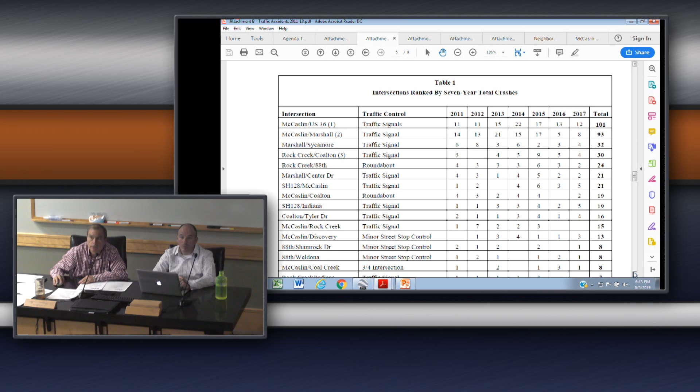Okay, we track by intersection. That's 2017 - did I pull out the wrong one? Yeah, while you guys are pulling up that sheet, I think that table is really outstanding because it tells you where the problem areas are.

Before it gets up there, I'm really a little bit worried about McCaslin and Discovery, just because it's going up, and anybody coming off Discovery going west doesn't have a merge lane. So they're coming off Discovery on McCaslin going downhill, and there's no acceleration lane? There's nothing. Granted, everybody coming down McCaslin's supposed to be slowing down, but many aren't until they get to the traffic circle.

And given that we are going to be pushing more traffic through Discovery, I'm a little concerned that won't get better. That's a good idea - maybe we can do a special study in the year, find out what's going on with those.

Yeah, because there's a dedicated right turn lane to get into Discovery Park, but coming out, there's no special way. But at the same time, with the punching of Discovery to downtown, they can come out on Main Street, so that is a new way. But you're, in terms of needing acceleration lane, you're accelerating into a roundabout, so...

Yeah, I know, and I'm just curious - it's only 3 accidents, but it still seems like a lot to me. The majority of McCaslin and Discovery accidents are all single vehicle accidents. Some have been during snowstorms. We had a guy that... actually we had 2 different cars that during construction drove off the pavement, and there's that dip, and it tore off the bottom of their car.

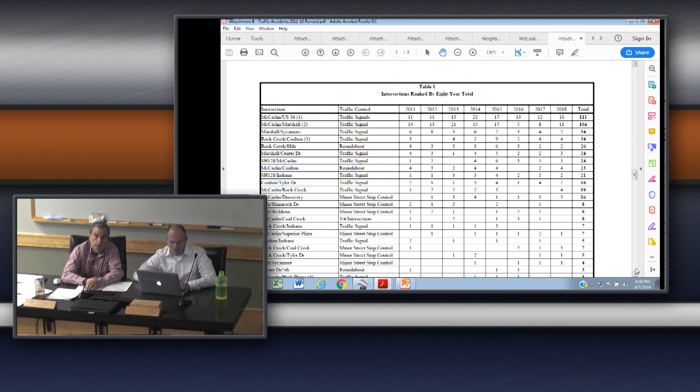And then this is a location map, kind of showing you where accidents are occurring. Again, the DDI and Marshall McCaslin are our two busiest intersections, and obviously we get a lot of accidents there.

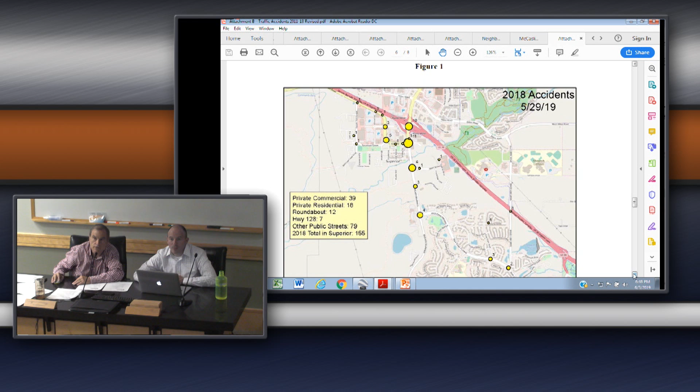Yeah, actually, I kind of saw the same thing - the way you ranked everything is based on 8 years of data. Right, since that's now brand new, it actually is like the third in the rank order of problem intersections.

The one thing I would like to call out on this map is that Indiana and McCaslin intersection. I was surprised when I saw the data to see that it's only had 3 incidents over the last 7 years. I know that's been one that the community has talked about quite a bit, so I thought seeing this data was interesting.

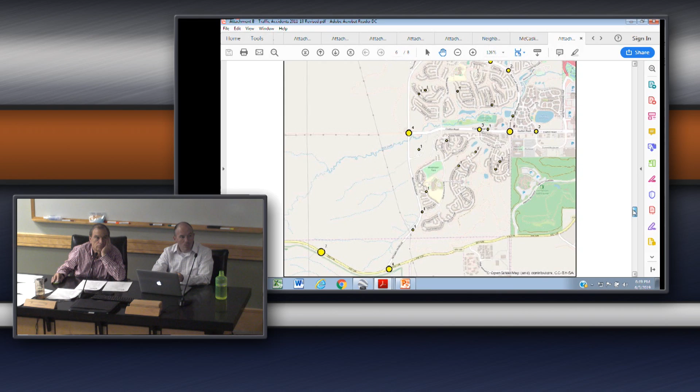I mean, I know I've definitely sat at that stop sign and waited for an opportunity to go through, and I think the speeds do make the crashes that happen there a little bit more dangerous than they might be in a slower zone. But the number of crashes was fairly low compared to what I was expecting to see.

Was it last year we had the bike accident? Yeah, so we had that one. That one though wasn't that at the top of McCaslin and 128, or was that at Indiana? It was Indiana. Yeah, the bicyclist was coming down the hill and the vehicle made a left-hand turn, hit the bicyclist.

So then we track it for the 8-year period from '11 to 2018. So again, most of our signalized intersections and the roundabouts as well all have 3 or 4 accidents a year, and that accumulates over an 8-year period.

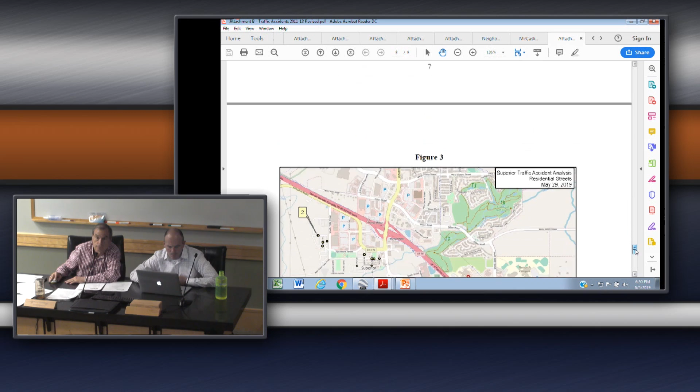This was an interesting one we put, before this, on this map we showed accidents in the residential areas, kind of grouped them, didn't give you too good a feel of where they're actually occurring. So on this last graphic, we pull out the actual locations of all the accidents on residential streets, try to give you a feel of, here's one up here, and...

Name that street. What are the numbers? What is it, 2, 3, what are the numbers? Is that number of accidents? Multiple in one place. Multiple accidents at the same location.

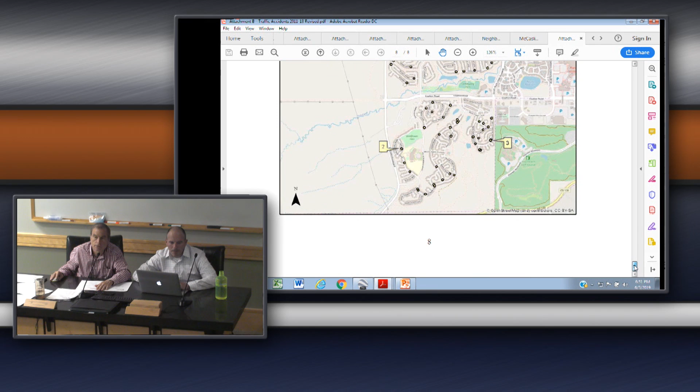So this gives us a good feel when we do have traffic calming requests. We can pull this map out and kind of show what's occurred over the last 8 years. So that's what's going on, and I think you pulled out... where's my PowerPoint?

So just so you can get a comparison of other communities, I did a peer analysis of the data that we had on our server. Took that slide out. Can you take that out? All right, you're gonna get a verbal. You have to write it down for me.

So Superior had 144 crashes last year, and so I compared it to Windsor and Boulder. So Windsor had 306 crashes last year, so town of Windsor had twice as many crashes as you had. And then the city of Boulder, which we do their crash data program, city of Boulder had 2,900 crashes. So you had 144, Windsor had 306, Boulder had 2,900.

So just as a gross comparison, I compared per capita, right? And so per capita Superior is 0.0073 crashes per person. Windsor is 0.012. And Boulder is 0.027. So that's a gross comparison, obviously you could think about employment versus population and traffic volume.

But just looking at your data, you have a very low crash rate. First of all, your total crashes are very low, and then your crash rate per capita is also very low. So we always say that we're working towards no crashes. That's the goal, right? It's a big lofty goal, but that's what we want. And so you being at half the crashes of the town of Windsor was really a good comparison. And then, just to put it in contrast of Boulder, you have far less than Boulder.

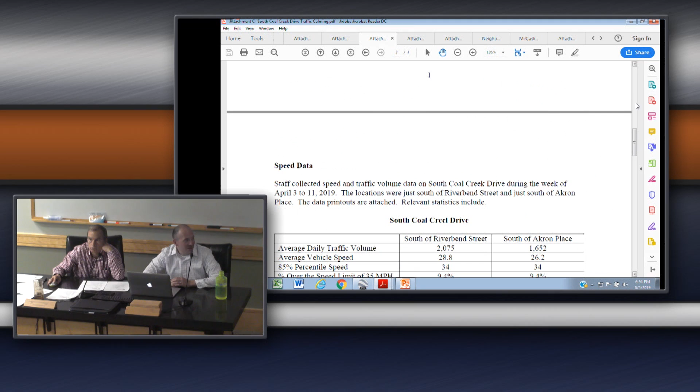Actually, it's a great question. If we could get that segmented, what's Superior Marketplace versus the Safeway parking lot, that would help. I mean, obviously we know there's a lot of volume going in and out of Superior Marketplace, but right now I'm not sure what we can or should do, because I don't know what the data is pointing to.

But I don't know if there's a trend. The master data here will let us know if there is a trend or not. I presume that there is, but I can't say that for certain. A lot of jurisdictions, if a private property damage accident is under $1,000, don't take a report. We take a report on everything, more than most jurisdictions do, because we want to make sure we take care of our citizens. So if they call and want to file a report, or claim there's an accident, we're going to take a report on it and document it, because nowhere else is it going to be documented other than in our report. So I think a big part of it is that other jurisdictions aren't tracking it because they're not taking reports like we are.

But you haven't changed your policy in the last 2 years, so the uptick is definitely there.

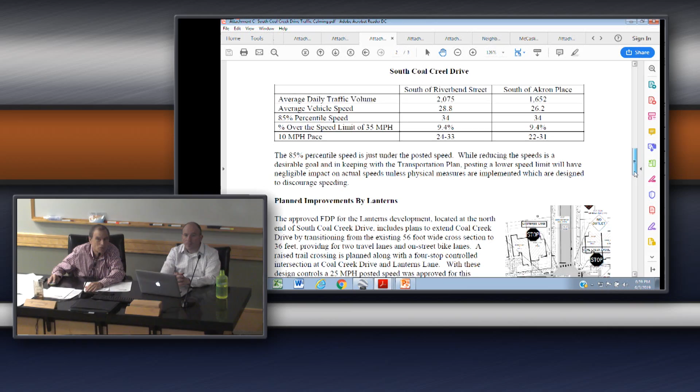So we can change the speed limit, but unless we do something else, we're not going to change the speeds. We have looked at going through Lanterns, and we decided we wanted to start necking it down, going into the town center.

If that ever gets extended through, we would go from 56 feet wide. We'd put a little median at the end of the existing Coal Creek Drive, start necking it down, so there'd be a median here. There's a trail crossing here. At that point, we'd have a raised crossing that would also slow traffic down, and then we'd have a 4-way stop.

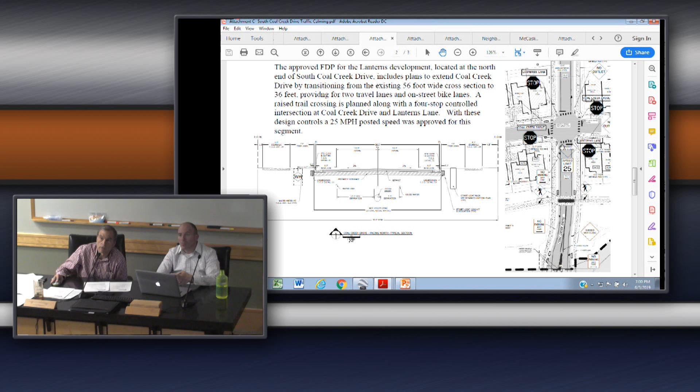So we have 3 design controls that would warrant a 25-mile-an-hour posting, and you can see we need to do that. You're south of Lanterns there.

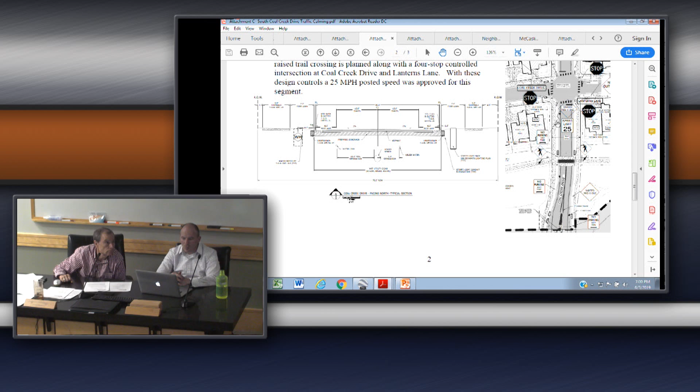Who's paying—let's assume that's a brilliant idea for the neck down and the raised crosswalk. Who pays for that, this here? This is all part of Lanterns, it's all part of the FDP. So Lanterns starts—I mean, that's the current road, so Lanterns will rip up the road and agree on the raised crosswalk.

It ends about here. That's the existing terminus? I thought it went further up.

Go back to the Google Maps—wait, are we looking at this backwards? No, here's the trail, I mean, that thing just ends there. Right now it's a rocky outcrop. Okay, yeah, I guess I thought it went further, you're right.

Do you get up there much? Yeah, I used to walk it every day. So that's the start of the traffic calming. Yeah.

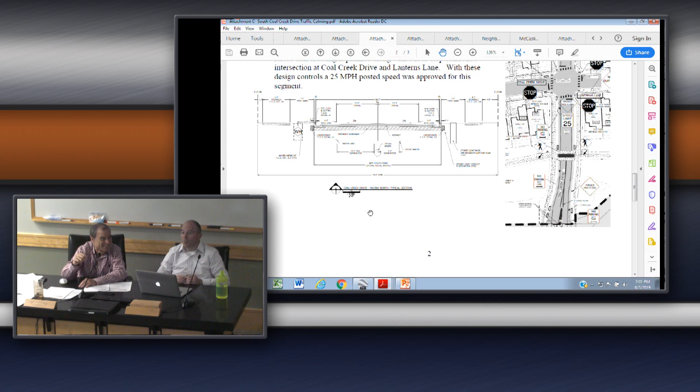So then we get to Akron. This is the plan that we had presented a couple months ago, last meeting and the meeting before, putting an island in the center and a crosswalk along the north side.

and take away the southbound left turn lane. The issue we had was a pretty short island here. We had a new crosswalk. It was difficult to make that longer because to scoot the ADA ramps, we had an inlet structure right here, so we didn't want to rebuild the inlet, so it was hard to get that any further to the north.

We did get with the school district to see, well, can't we just have the stop? I think they were stopping here and here. Yeah, they're stopping at the north of Akron. So we asked, can we stop on this side and be able to build new ramps where there were no constraints building the ramps? We also had a light pole here that was in the way.

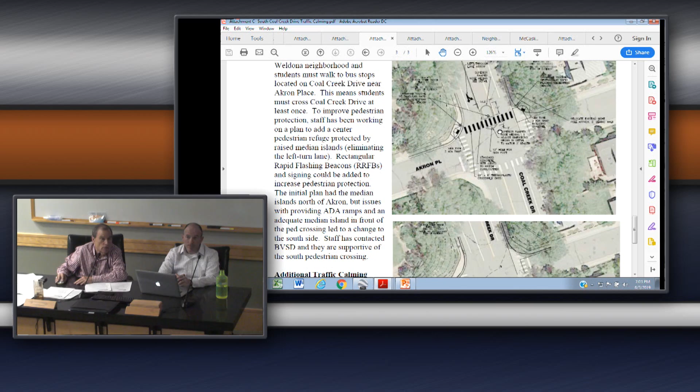Can we do this with some islands and build new ADA ramps to make it a more enhanced pedestrian crossing? So we had costs for this plan, which was about $75,000. So we wanted to bring those costs down, and we haven't got costs on this, but hopefully we'll get that down. So that's the status of that.

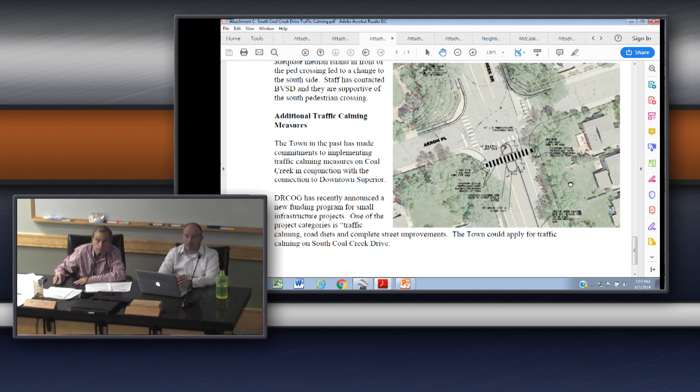And then in terms of the future, there is a new program from DRCOG that is coming out. I'm attending the mandatory meeting before you submit applications tomorrow. One of the items you could apply for would be road diets or traffic calming, so I'm thinking this could be a candidate for submitting an application for federal dollars to do the rest of the traffic calming.

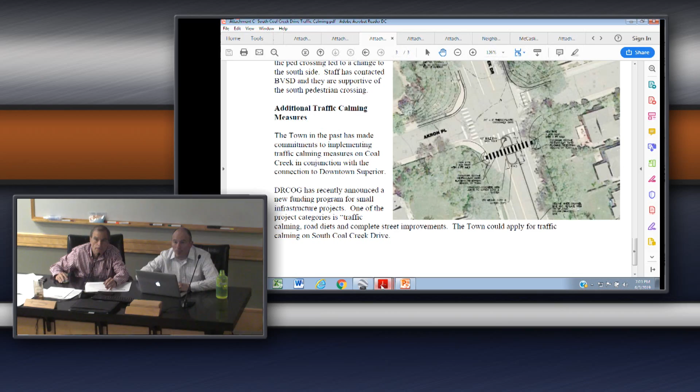And I think if you really want to make this truly a traffic calming street, we could put a median all the way—that's pretty expensive. We could put islands on either side of Riverbend. We have a trail crossing here that we could do a raised crossing or something for, they don't quite line up, but we could do something here to make that a traffic calming feature.

Is it Stoneham? Is that Stoneham? We could also do something at that point. So it's probably 4 or 5 locations, or we could look at doing the median the entire way.

So I'm thinking about going to the DRCOG meeting to see what we need to do, and I'm putting together an application. I think we have to have a letter of intent submitted by June 14th. I'm not sure what that entails yet—that just means we're thinking about applying, we don't have to commit, so it's kind of a short time frame. I haven't been able to discuss it with the board because this just came out. Just so you guys are aware, I've traded some notes with Alex and Carlos throughout the last couple of days.

You got some of them because, just so these guys are aware, Louisville's been dropping these all over. What I learned is they've just been getting aggressive about pedestrian safety. They don't have to go to the board, the traffic department's just got money to go, and they're getting them at $25,000 a pop. But they don't have the blinkies in the middle. They're also doing it under an existing contractor who's already doing major CDOT work, rather than bringing out somebody specifically to put these in, because we lose the economies of scale.

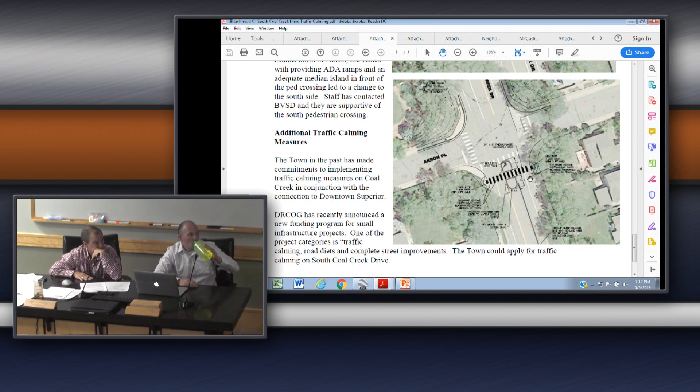So just a big picture question—irrespective of what happens with Coal Creek to the north, whether it goes to downtown or not, the town in 2014 identified the need to make some major steps in terms of traffic calming.

I'm a little concerned about doing something too soon without having the full scope of what we could or would do to the street. Don't get me wrong—since September of last year when Waldona was closed, we've had parents asking for us to do something here, and I don't want to wait. But at the same time, when it comes to the rest of the street, what's the macro decision on Coal Creek, I kind of feel like that should get done soon.

And it kind of is sort of irrelevant, or rather, what happens to Toll Brothers and the rest of the connectivity is kind of a separate matter. That's why I appreciate the update around Akron and South Coal Creek, but I thought we already had a decision around going forward—so, right, so we've got the decision.

I don't think we revisit the Akron Coal Creek decision, but I think we continue to consider gold, silver, bronze type thinking for the rest of Coal Creek, and whether or not that traffic volume is going to go up—with lanterns, it's going to go up, I don't know, 20, 30%, I don't have your data in front of me, but it goes up a bit.

If it connects through, the 20-year traffic data says there's a lot more traffic. And if there's additional traffic because of the increased volume, let's not tempt fate. Let's install more traffic calming measures. It just feels premature, and we're going to have a decision on the punch through soon.

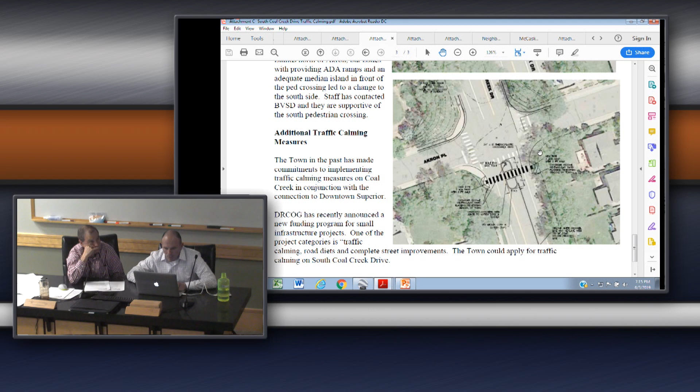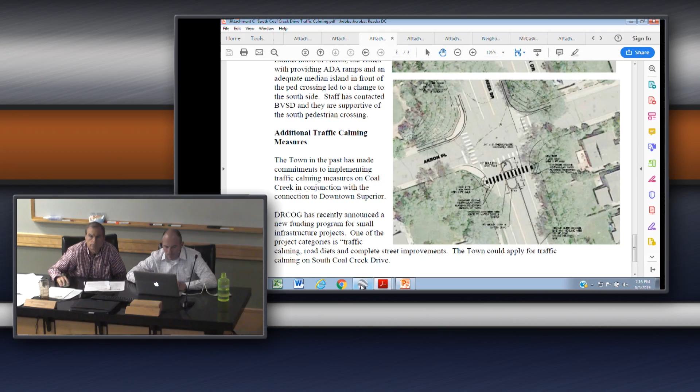But Indiana south of Colton is 25, isn't it? There's 25 and there's 30 - it's 30 north and south of Colton. So when is Indiana 30? North of Colton, in front of Superior Elementary, it's 30. South of Colton, it's 25. Oh, I didn't know that.

So it's 30 posted here until you get towards Peak - so it's 30 here, and I think it changes to 25 right here. So in that stretch, that's 30, and it's posted at 30 until you get up to - so 25 essentially only around the schools, except for the actual school zone where it's lower. So it's 25 around the schools and 30 otherwise. I think Indiana from the other direction, yeah, this is posted at 30 right here. Yeah, it's posted at 30.

Just a bit of data I showed you at the first meeting as a reminder - pedestrian survival rates based on miles per hour. Pedestrians have a 40% survival rate if hit at 30 miles an hour. If hit at 20 miles per hour, their survival rate goes up quite a bit - about a 2-to-1 ratio. That curve, as speeds go up, isn't linear - it's exponential. So if you're thinking about trying to save people's lives, a 5 mile an hour difference will save roughly 15 to 20% more lives if a crash occurs. They'd have a 20% higher rate of survival as a pedestrian.

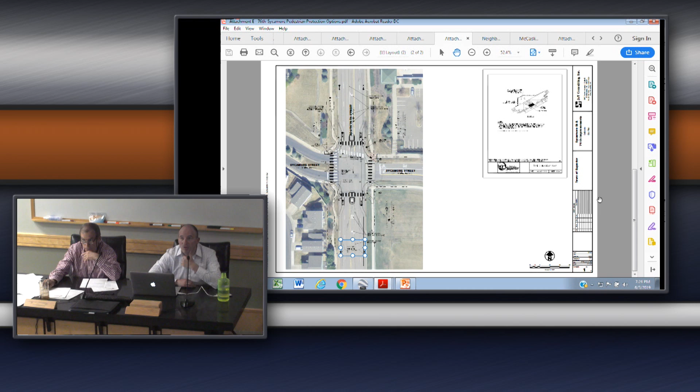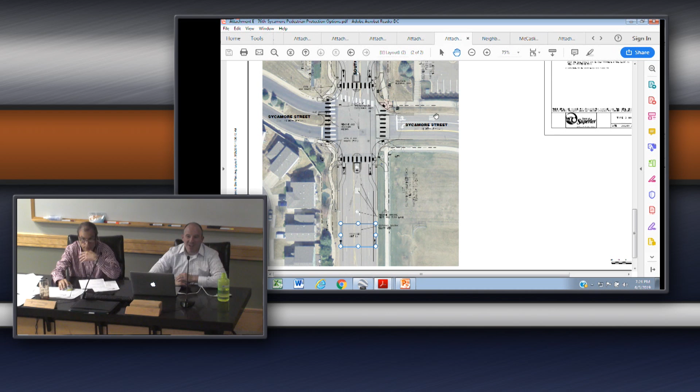Can you zoom in on that? So we can toggle back and forth. Okay, go to that plus. Yeah, there we go. So just for orientation's sake, this map is pointing up. Can you scroll it down, push it down a little bit? Before you go too far, Carlos or Alex, in the previous picture, remind me again here...

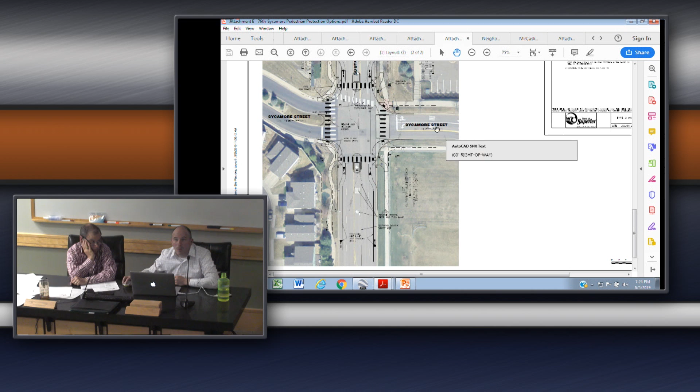Isn't 76 striped for just one lane? Yes, correct. The drawing made it look like it's two north-south, because I was pretty sure we, at some point, had restriped a bike lane in there already. Yeah, they took an old aerial. Okay, I just want to make sure.

Okay, let me go back. All right, so I'm going to try to do this. Give me just one second to zoom in so everyone can see it. There we go. Okay, so north is up in this map.

So the idea here is that we're adding the crossing features in the middle. So we're deleting the left-hand turn lane out. If you're executing your left-hand turn, you're going from that lane. Likewise here, you're making the turn from this lane, and the turn lanes become median refuges. We're reconfiguring these crosswalks. Alex talked earlier about the need to make the ADA compliant crosswalks connect to the new treatment, right? And then so there's a median feature that exists with this design. There's new crosswalks at all legs of the intersections.

This is kind of an interesting crosswalk because it happens in the valley, near the valley pan today. So we did some extension of this nose median here. And then we're actually trying to get a small, we're pulling it back. The crosswalks in the valley pan today, and the neighborhood was really helpful. When you're sitting here, it's hard to see that crosswalk because it lives in the valley pan. So by moving the crosswalk back, we get better ADA compliance, and plus you get to see it when you're approaching. So you're driving this way, you can actually see the crosswalk. So we did some nose treatment on that.

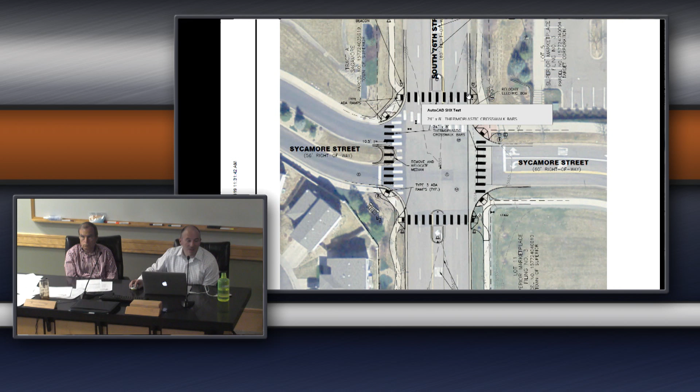And so this would be a significant rebuild of the intersection, but it would result in a narrower crossing distance. If I pull back for a second, the crossing distance in this design, keep me honest here - this is the point of exposure. You're exposed, exposed, exposed, now you're in the refuge, you're not exposed, and then you're exposed again. So your exposure distance is shorter in this design.

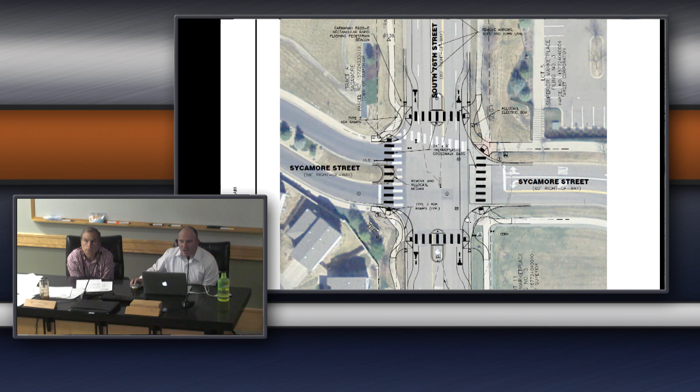And then in this design here, you have less exposure. You're standing here, still protected on the curb, then exposed for a shorter distance, then you're in the refuge, exposed again, and then you're not. So it's a shorter exposure time on both sides. And for this crossing, you're also exposed less because this one has a little bit of a bulb. It's not as dramatic as the other one, but there is a difference. So those were 2 ways to approach that.

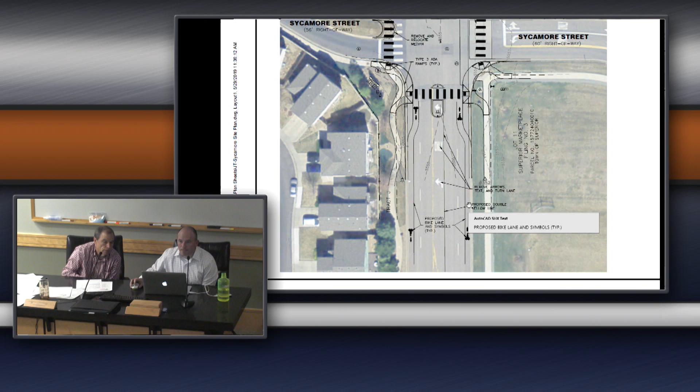We did, on this one, the radius of the curb return here - you notice how that's pretty tight, but we made this much wider because that's where the truck movements are. Going around, if any trucks are making right turns, they're probably not making right turns like this, but they may be doing this going up to Target or Costco truck docks. Most of the trucks come in from 76th Street, but we provided a little wider radius there for the trucks.

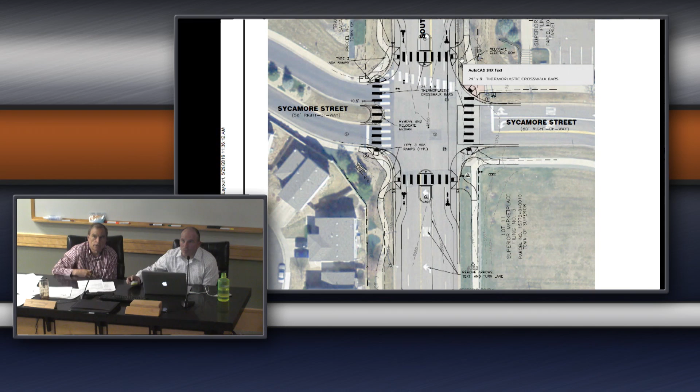So then just to keep me honest and remind me too, the buses would be dwelling coming southbound. So the buses are going to dwell in this zone or in this zone, just like we talked about. Right, so that's where it is today.

The hope with these projects - we've been trying to coordinate with BVSD and we'll continue to - is that the buses are dwelling closer into this zone. And the idea with them dwelling in this zone is that anybody who's waiting here is less tempted to leapfrog the bus as a result of this vertical feature. So the idea would be the bus would actually dwell in this zone, put on the sign that says stop, children would depart this way, they could go this way. If they're going this way and this way, the hope is also that that would stop that.

What was brought up at our community meeting, which is a good point and reminder, was that if the buses are dwelling there or someone stopped there, the east-west traffic can still proceed. So there was some concern about a child getting off the bus and proceeding southbound - that bus, or even the RRFBs we have here, don't stop this movement. They only stop one movement of the intersection. So the bus being here or the RRFBs being activated only control that movement. It's still going to be incumbent on the drivers to pay attention and be aware at this intersection that someone will be crossing at that location.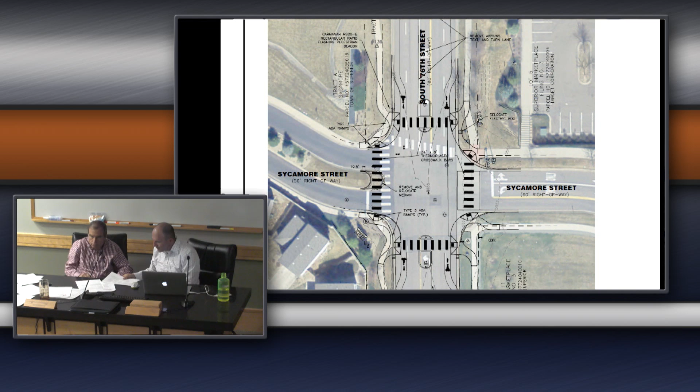If you go back to the new flow chart, can I have that for a second? So we clearly determined it was eligible. We had data from prior work. We went to step 4, which was a neighborhood charrette. We identified some tools, and we're bringing those back to you in step 5 tonight. What we don't have yet are survey results.

So what we're doing is kind of proving that with you, and the cost. What we do next, if we're going to continue to follow this process, is bring this back out to community survey. That would get to the point we spoke of before — what happens with the survey results? But if we want to follow the checklist, we're in step 5, looking for feedback on whether we should proceed with a survey.

Allie, did you want to mention anything?

I think I just want to speak to this one as being superior than the other one, only because — this doesn't really do it justice — the distance you have to cross is really big for an adult. But there's also a huge park right here, and we have 20-something kids who want to go play. So it's really important that we think about them crossing alone too. Making that distance shorter and doing those bulb-outs, I think, is the way to go here.

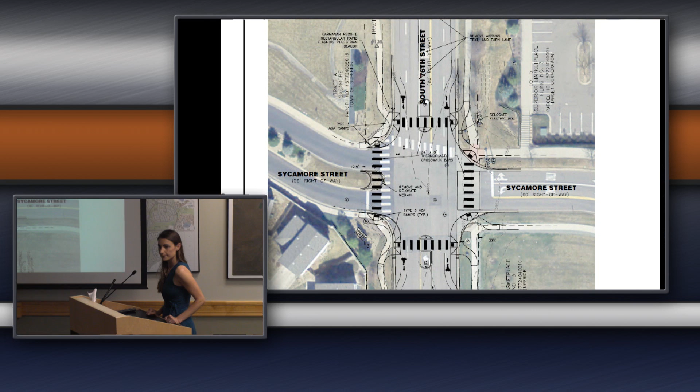Is there anything else you wanted me to speak to? Can you just summarize the process that we went through at the meeting? Yeah, definitely, that's right. Yep, okay, all right.

And Allie was instrumental in making all that happen. So if there are others looking for advice on how to make that happen, she was really great in pioneering and getting everyone here.

What was also really important about that process is there were a lot of children here. It made me think, for the future, it would be good to have someone who could help with the children, because the parents are here to give input on their own time. And you had a couple neighbors who volunteered to be in the room with the children.

It's actually only my husband. Oh, so he earned his fee that evening.

So it reminded me that we want neighborhood input, we want families and children to participate in this, and if we're going to have these in the evening, offering a room and a place for that to happen, maybe he's available for others.

But we had 13 kids under 6, that was a lot. And they were really patient. But it was great because we had a lot of parental input for that hour. That was remarkable. So it reminded me that when we do these with other neighborhoods, we need to be thinking about those mechanics. So that's the design we have.

So the action item we're looking for, well, if we talk about going out for a survey, you want the staff to define an area. I mean, obviously we have Sycamore, but we do have potentially Coal Creek Crossing. I think there's students coming from Coal Creek Crossing.

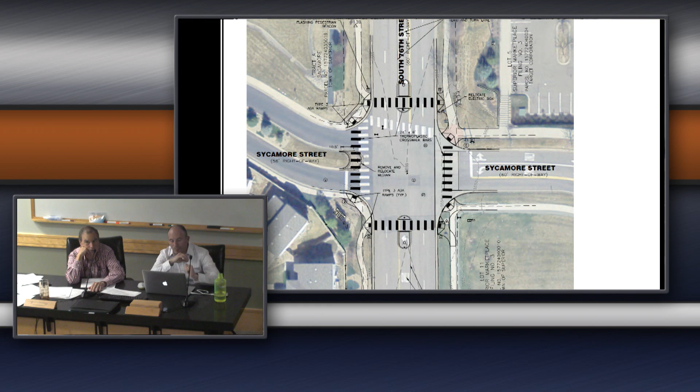They all involve ADA ramps, so that's the biggest part in RRFBs and islands. So the additional cost for the bulb outs is not that much, but it's going to be a significant cost at the intersection. If you did one, you'd be rebuilding those ramps. Couldn't you reuse them? You're right, you'd have to bring them out again.

So you'd lose half of the project budget rebuilding those. So you kind of have to, and you can't build the median refuges without getting the ADA sorted, right? So you can't just put that in. So you have to kind of choose this one or the other one. And I shouldn't say choose.

What you could direct us to do is we could go back and get some cost information for these, and we could get some survey results. We could do the larger area and identify the larger affected area, come back to you with the survey results of that, and then the cost for these.

And I think one way to frame this with the community is to say, we're considering some traffic calming improvements at this intersection. Here are the two designs, and we could say this one would cost, we could put order of magnitude, say this one would cost more than the other one. Which one do you prefer?

And then that way you have some feedback data about the relativity of cost to those when we come back, not just, yeah, I want it. I want to say, yeah, I want it, and I think the town should spend more on, as example, this one, 80% of the people said yes, and then we'd have a larger area so that you'd have some feedback data on it as well.

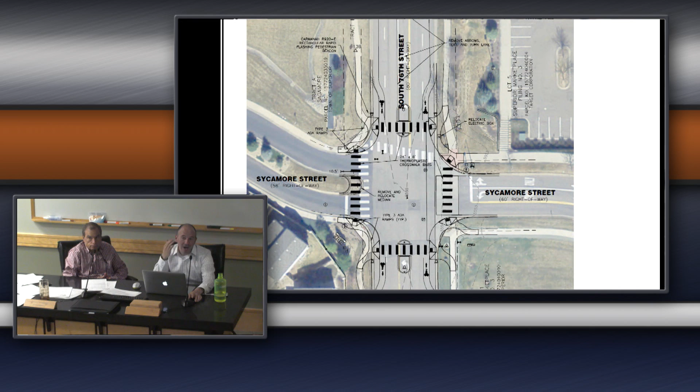If you package these as well, you're talking about hiring a contractor to do curb work. You package a project like this with maybe a couple of the other ones, and then you start to get that economy of scale. The expensive part of the concrete work is not the forming, it's actually the truck coming out and delivering the concrete. Forming is expensive, but once you get a truck out and it gets 2 full loads going on a project, there's economy of scale. So I think we need to cost these out, so you don't get sticker shock, and get line item costs so you can see more about that.

Other thoughts or comments? You mentioned that the business is nearby. I'm optimistic that there shouldn't be a lot of truck traffic. Guardian Storage is up north, and the Target and Costco delivery trucks really should not be on 76th or Sycamore. It'll be interesting to find out if there is any pushback. We seldom get feedback from those corporate offices, because all those decisions are made elsewhere.

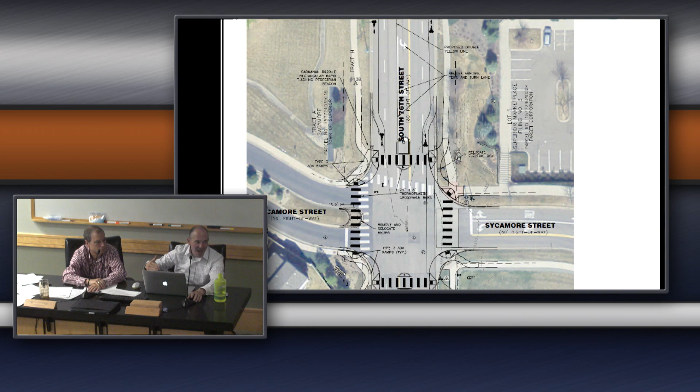If the loading dock for Target, the trucks would have to make a very difficult right-hand turn to get into the loading dock. So when you're going north on 76 and you're a 40-foot truck, you're probably back down, you'd have to hammerhead - go up and then back in. And then if they come in from the north, they're maybe making a left in and hammerhead in the parking lot.

So I'd be curious - I would be surprised if a lot of trucks were making this right-hand turn movement, and then there's no way they can make a right to get into the dock. So that may give us some feedback that maybe we could tighten that up a little bit, because the 40 to 50-foot tractor trailer is the dimension that's making that happen there. It's not a fire truck, it's not a trash truck, it's actually that vehicle. So we could probably tighten that up, but that dimension is part of the feedback loop.

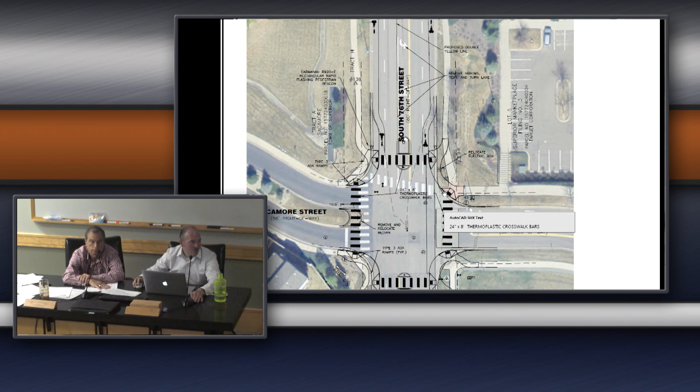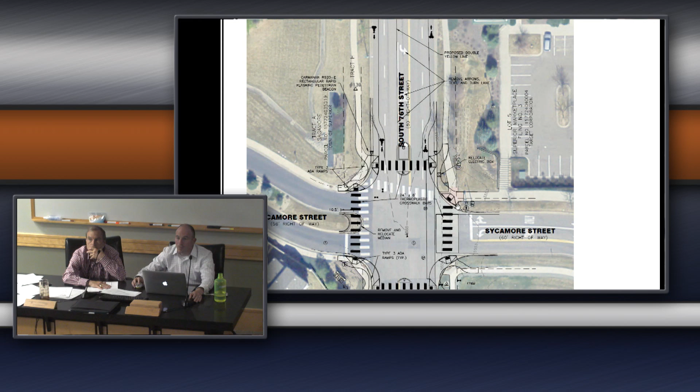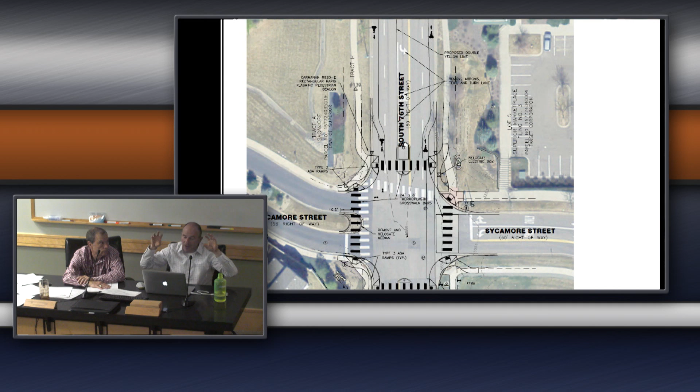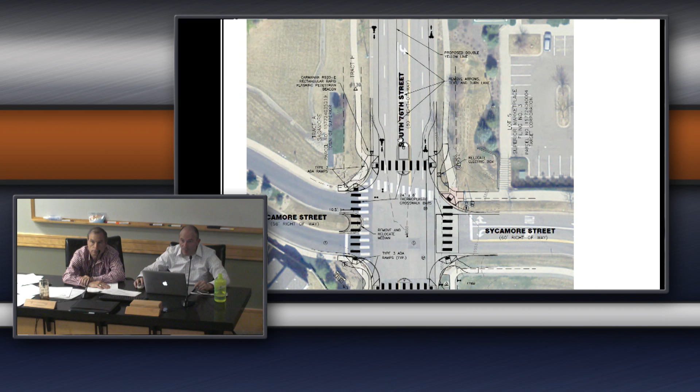Sorry, I have one more question. Would you guys put signs inside the pedestrian refuges too, like yield signs or reflective ones? Yeah, there actually is a special sign that goes in there because it has the flashing beacons. So there would be signs in the median right here - yield to pedestrian. So if you're driving southbound, the sign's right here, so you can see it going that way. And then there would be another one, a sign here for people who are going north.

And for this one right here, where would those be? We could put one up north for the people turning right - so you're talking about this movement. For that movement, there wouldn't be one because it's a stop sign controlled intersection, so there's no flashing crosswalk for that movement. It's a standard stop sign with a stop bar.

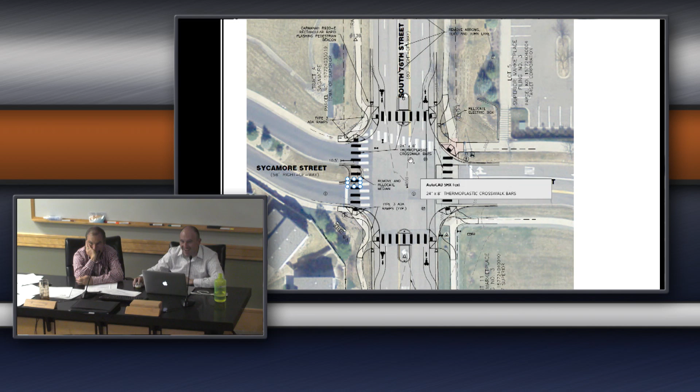So how are you saying that they would be alerted that the kids are crossing here after they get off the bus? They wouldn't be. We don't have access to a device short of putting another flashing crosswalk here and here. You already have stops - the stop sign dictates the control. It's really hard - we can't put, some communities put signs in the middle saying yield to pedestrian in crosswalk, but there's already stop signs there that govern that you should stop. You're only supposed to use those signs where there isn't a stop sign. So that's why the only trick we have in the playbook here is to move this crosswalk up to higher ground so that someone standing here can see somebody crossing here.

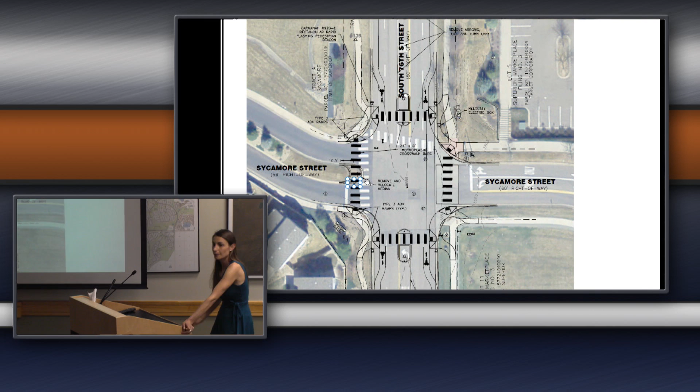I do think the thermoplastic crosswalk bars are necessary because we've had these painted several times and they just wash away the paint. Especially because they're in the pan here - that's the conveyance of water and snow and freeze-thaw. So that's another reason.

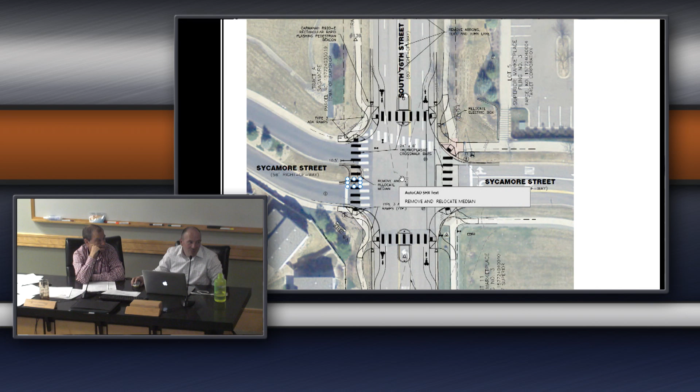Okay, so we would like to define a study area, come up with a survey that is relevant to folks and that matters. I would like to be able to help with the survey because there are some ways to ask survey questions. And then we would bring those questions back. You can't ask too many either because people get survey fatigue. So we want to get that out and get the results back for a pending TSC meeting.

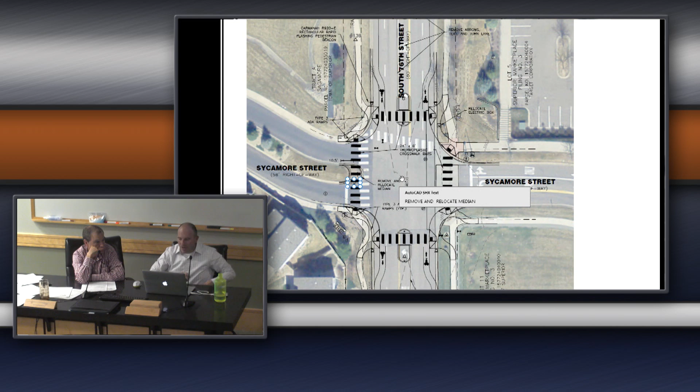And then we'll also do some more cost estimation work on these, so that when we come back to you, we'll have estimates and community feedback. At that point, we're going to be in step 5 where you're going to say, okay, are we going to recommend this for town board review, not for approval, but for town board review. And then at that meeting, it would be on the agenda, and the neighborhood would know this is the meeting they need to come to and talk as part of public comment about the project.

So that's how we would like to proceed.

As far as sending the survey out, what would be the mechanism for doing so? Well, that's a great question. There's a couple ways that we can do it.

We could do it electronically. There's a company where you have a code and your address, or a code that allows you to take the survey because you're in the address zone. We could also send it out through a mail route. You can buy mail routes that have certain addresses, and there are companies that offer that service now. That would be another way.

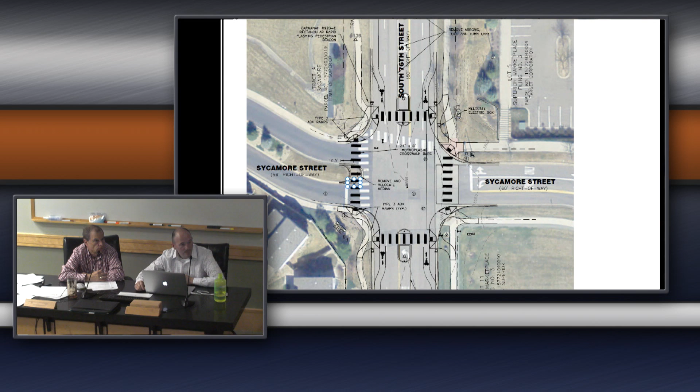So it hasn't been technical in the past, and it's kind of my job to help Alex make it more technical so it's within the bounds, because we want to make sure people within the zone area are the ones weighing in. We have all the utility addresses, so if we define an area, we'll be able to get labels for all the residents within it.

Yeah, so I do have a preference in how we do this. I would love if we could send out an electronic survey where one of the questions is, what is your street address? And then I would like to see us allow others to weigh in that aren't in the area, but like we did with the recent Riverbend survey, be able to show...

Clarify, these are the responses from Zone 3, the Zone 3 survey. Thank you, Neil, sorry. Although it was titled the Riverbend survey, and retitled since. Oh, okay.

But I would like to, is there interest in... maybe we don't reach out to them, but maybe the Coal Creek Crossing residents do want to weigh in, and I would like to see their input included, even if we look at it separately. Is that supplemental mailing? Because not everybody has email addresses, so how do we get to them?

Right, my preference would be if we send an email via the townwide listserv so that it reaches everyone. The assumption is that those affected would be the most likely respondents. And then I would also like a postal mailing to go out saying, please complete the survey.

So I have an idea that we've done in the past for that. In the utility bill, you can direct mail everybody who's in the affected area, and they get a code. Say, take the survey, and your code is neighborhood 1. And then when they go to the survey, they enter the code neighborhood 1.

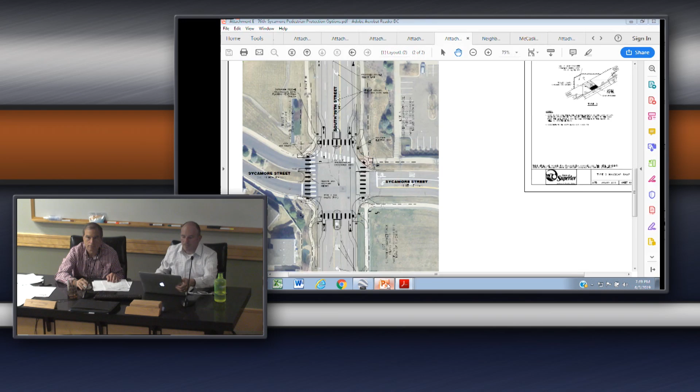So, other projects. Some updates on Wildona. We're waiting on the bollards. Hopefully they're in this week and installed, and then we have to do some landscaping.

On Castle Peak, we had the one upper temporary speed hump installed. The permanent one will be installed in mid-June. We're going to do some concrete work right where we're going to put that speed hump. There's concrete failure on both sides, so we thought let's replace some of that concrete and then put this permanent speed hump in there. That'll be done mid to end of June.

Pitkin, we're moving forward. We've already collected some data, and we'll collect some more for presentation to you in the fall.

Current requests: McCaslin, Indiana. We've taken counts. We've done a preliminary traffic signal warrant analysis. We've developed some concepts for a left turn acceleration lane, a traffic signal, and a roundabout to see if a roundabout would work. So we're in process of doing that.

But I did want to talk about the Rock Creek Circle neighborhood meeting. I sent out some dates. Seems like Monday the 24th would work. I know, Laura, you're out of town, and it's not necessary for you to attend. We'll take some notes. It's really to get input from the neighborhood, but we'll get that going, I think, on June 24th and get the notice out so we give adequate notice to those people.

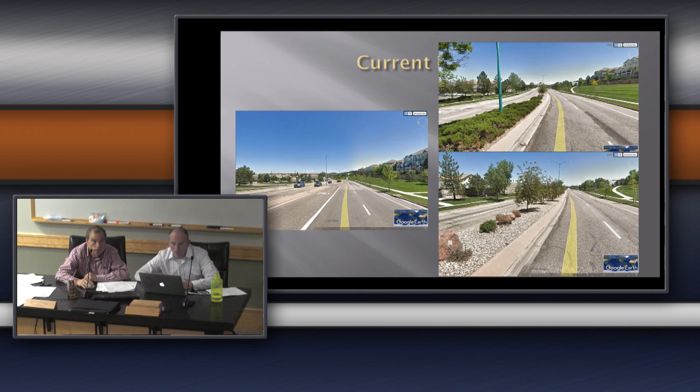So they have to backtrack. I think it's because there's two sidewalks to line up to. They picked the north one. Oh, I see. Okay, so I'm trying to get that one to line up.

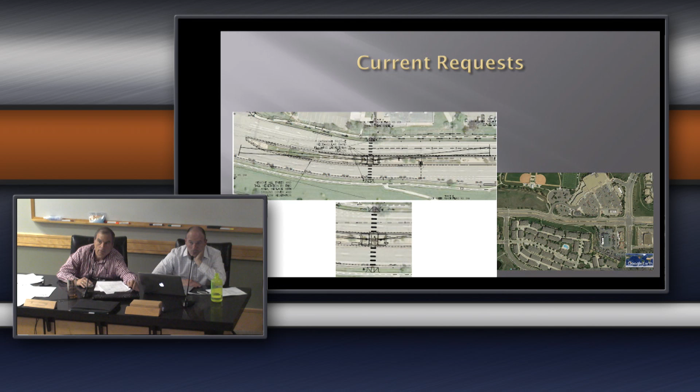The picture's not the greatest, but I think to Laura's point, you just split the distance between the two, right? Because on the north side, it looks like you got about 10 feet to the left to where you join the sidewalk, and on the south side, you get about 10 feet to the south where you join the sidewalk. Exactly. Yeah, this will be better, is what I'm looking at. It's kind of in between the two, so it makes sense.

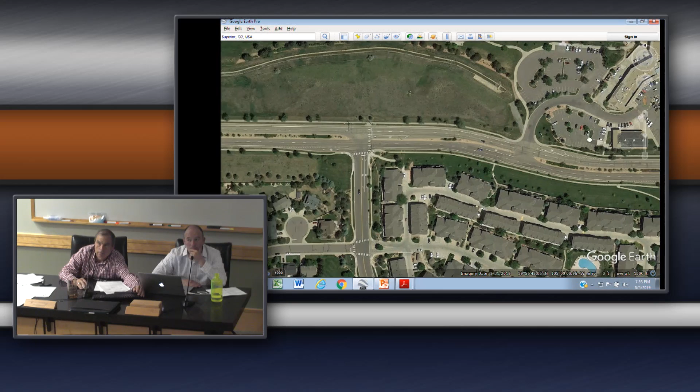I think the point is your sidewalk is right here and it kind of goes down there. So because there's 20 feet between the two of them, you guys are just splitting the distance between the two. Yeah, we can split the difference. Sure, yeah, that's fine. I think it's a good idea to get feedback from the community on it.

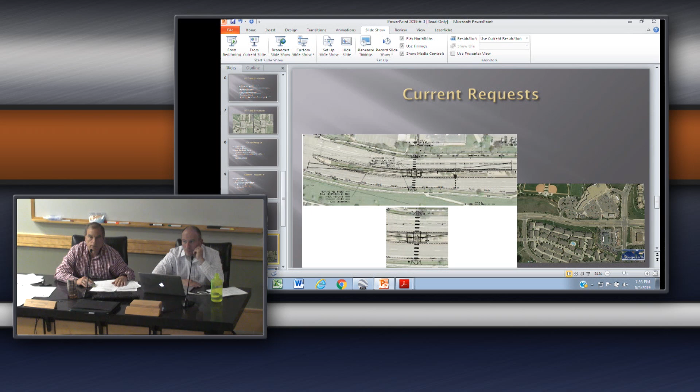Okay, I think it's okay. Final thing on our request, we've sent out the application to North Torrey's Peak, to Yarrow Circle, and to Riverbend, all asking for speed humps. So you may see these coming back in the process as we go forward.

Great. And the final thing on the agenda was discussion of Rock Creek Parkway, continuing a discussion from the other night from the town board meeting.

So before we get into that, Alex, one thing on the current requests, for future agendas, can we list all the different streets and topics here just to make sure residents are aware of what's going on? Well, the reason why I didn't do that is because I didn't want to raise concerns out there that they could come down and testify, you know?

Okay, well, maybe not on that one, but even like what we just talked about with the Colton Drive sidewalk or things like that. Just want to make sure everybody's aware of what we'll be discussing. Because if I put Picken on there, they'll be, oh, I know.

Yeah, so maybe not the ones where it doesn't have to say all the street names, but even here are the upcoming requests, like for speed humps on Yarrow, is that coming forward or not. Yeah, I think once it gets to that stage, once somebody goes through the trouble of getting however many signatures, it feels like let's start putting that as an update so people know. I don't mean that level.